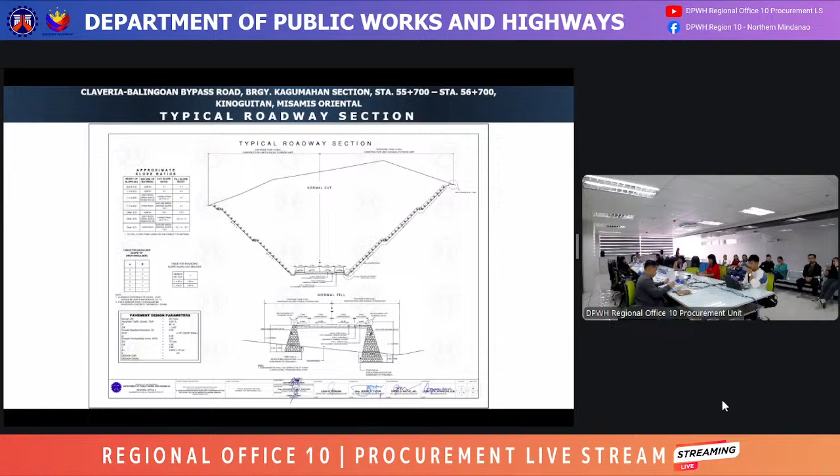This is the site photos, the beginning section, mid section, and end section of the project. And this is the typical roadway section for this project. Also shown are the nearby quarry sources, namely Donguan, Santa Ines River Quarry, and Agayan River Quarry.

This is the bill of quantities for this project, divided into several parts. For part A, facilities for the engineer. For part B, other general requirements such as project billboard, occupational safety and health, traffic management, mobilization, demobilization. For part C, earthworks. For part H, miscellaneous structures. For the minimum equipment requirements, we have 7 major equipment and 1 minor equipment, for a total of 8 equipment.

Also, in pursuant to Department Order 110, Series of 2024, which is the implementation of ISO 9001-2015 certification requirement for large A, medium B, and medium A contractors in the procurement of infrastructure projects of the department. Note that the license size range for this project is at least medium A.

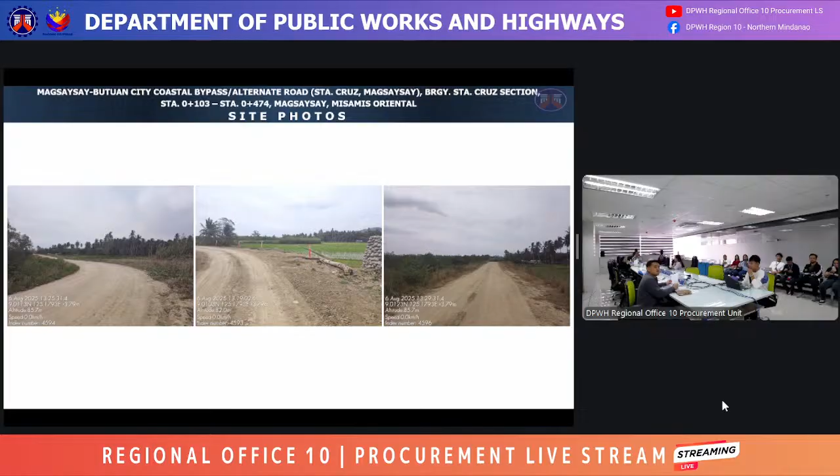This is the site development plan for this project, and these are the site photos showing the beginning section, mid section, and end section. This is the typical roadway section.

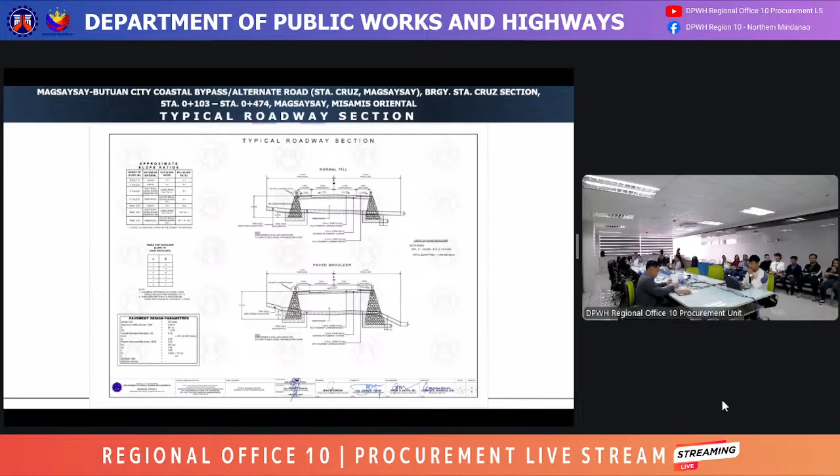Also shown are the nearby quarry sources, namely Panaghusa, Hiusa, and Tibon River Quarry. This is the bill of quantities for this project.

For the minimum equipment requirements, we have 16 major equipment and 9 minor equipment, for a total of 25 equipment. Also included is Department Order 11, Series of 2017, on the inclusion of the minimum material testing equipment in the technical component of the bid.

Also from Department Order 80, Series of 2016, the mandatory use of joint sealer equipment for sealing joints on concrete pavements, and in pursuant to Department Order 110, the implementation of ISO 9001:2015 certification requirement for Large A, Medium B, and Medium A contractors in procurement of infrastructure projects. Note that the contractor's license size range for this project should at least be Medium A.

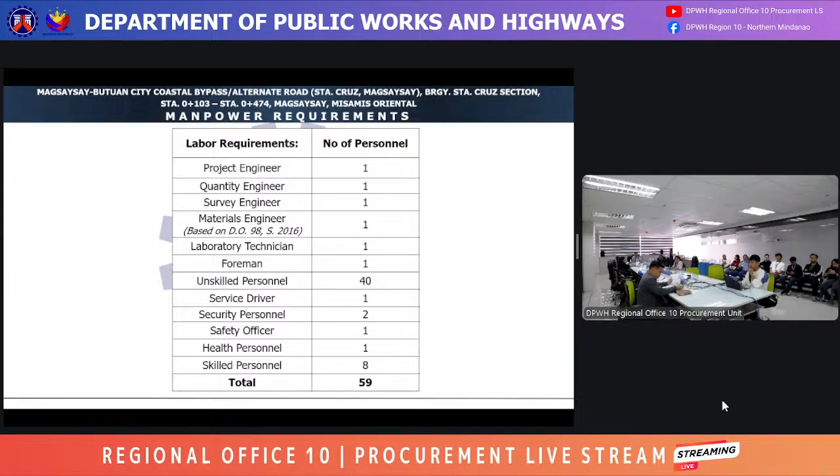For the manpower requirement, we have 59 personnel to complete the project, which is also included from the revised guidelines on the accreditation of contractors, consultants, and material engineers, Department Order 98, Series of 2016.

For the information of everybody, the submittals for this project were all already approved, and this is the cover page of the approved DED plan for this project.

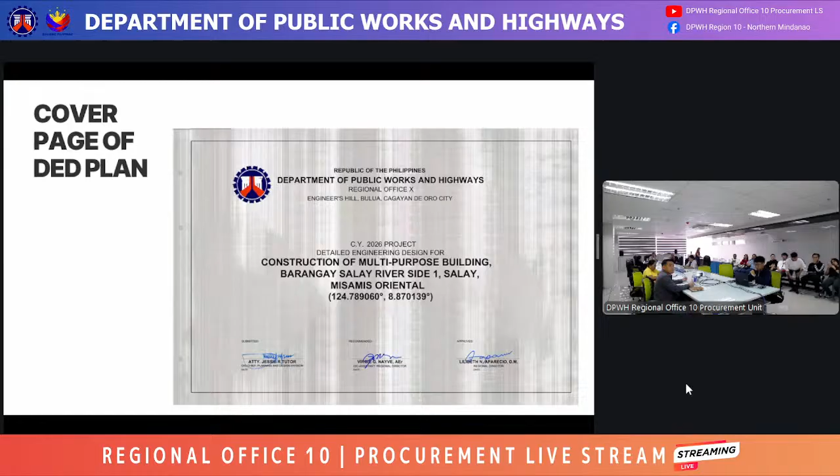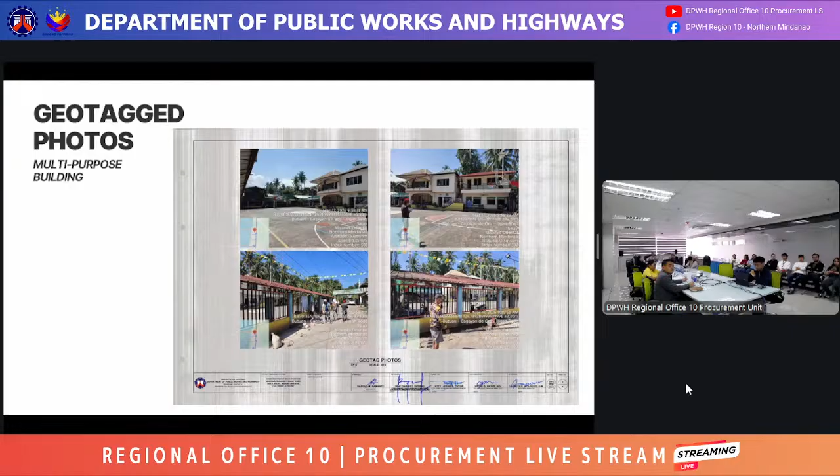Shown here is the sketch plan of the project location, the cover page of the DED plan, the site development plan, and vicinity map. We also have here the geotag photos of the project and the perspective. And these are the floor plans.

For the bill of quantities, we have the following: Part A, facilities for the engineer; Part B, other general requirements; Part C, earthwork; Part D, reinforced concrete; Part E, finishing and other civil works; Part F, electrical.

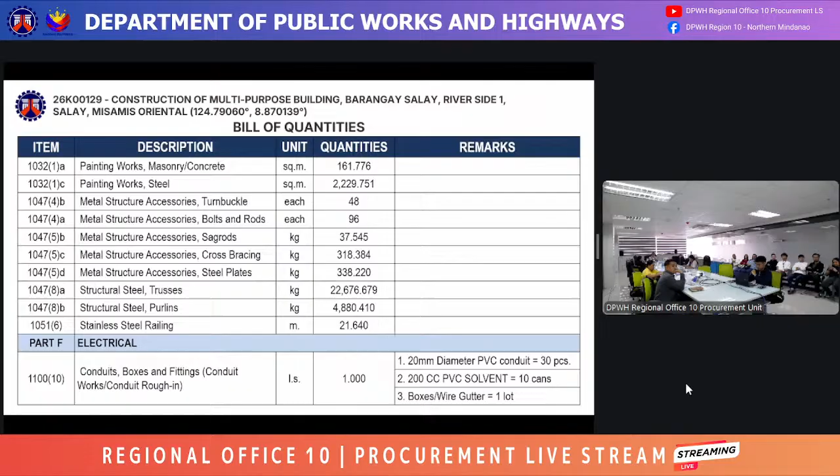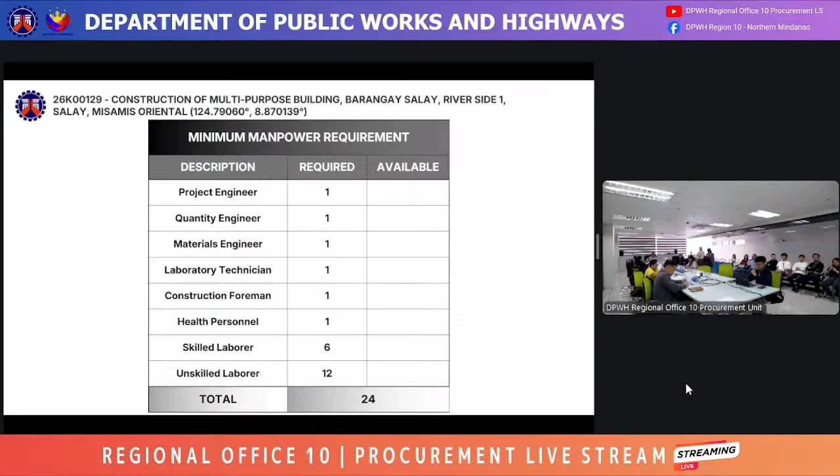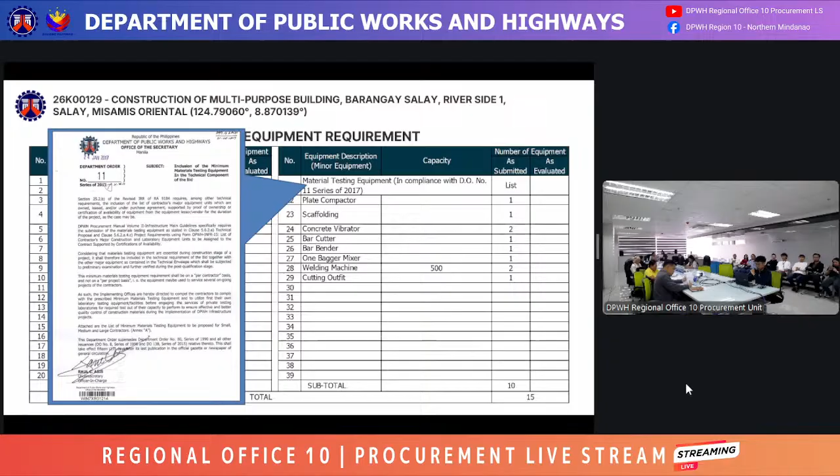For the minimum manpower requirement, this project requires at least 24 personnel for its completion. And for the minimum equipment requirement, this project requires 5 major equipment and 10 minor equipment, with the inclusion of material testing equipment in compliance with DO number 11 series of 2017, with subject inclusion of the minimum materials testing equipment in the technical component of the bid.

And we have here the list or the minimum materials testing equipment for small, medium, and large contractors.

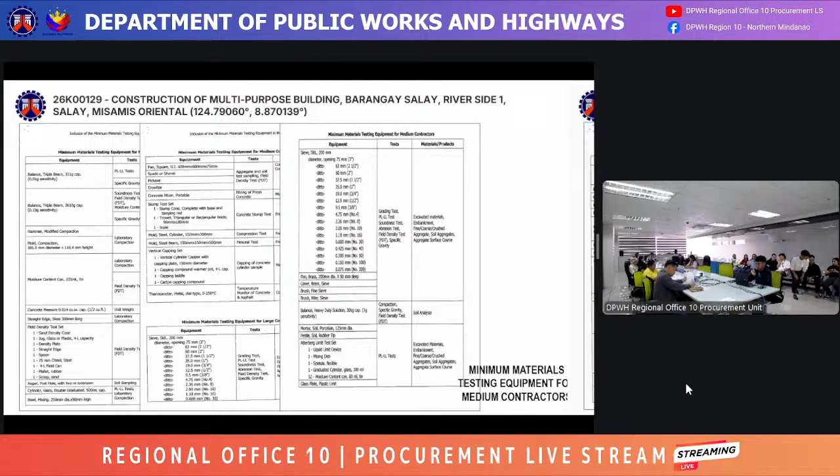For the minimum contractor size range, this project requires small B with license category C and D.

And we have here the sample format for the list of the contractor's major construction and laboratory equipment units to be assigned to the contract, supported by certifications of availability. And for the summary of submittals, the POW, ABC, DUPA certifications, as well as the DED plan, were already approved.

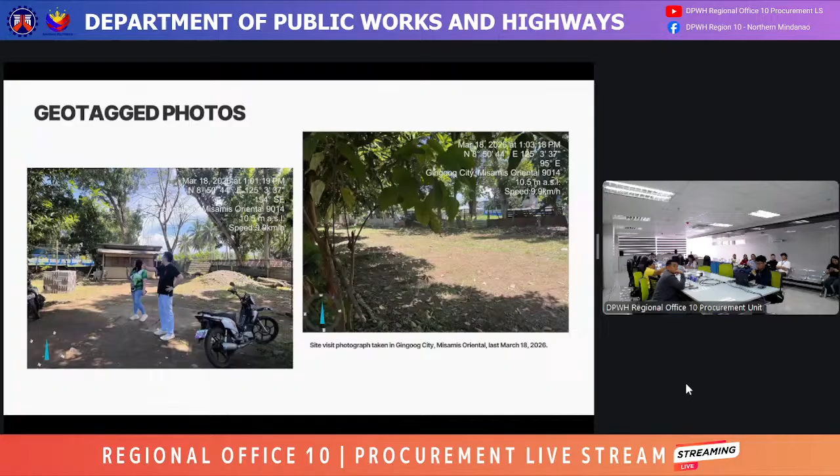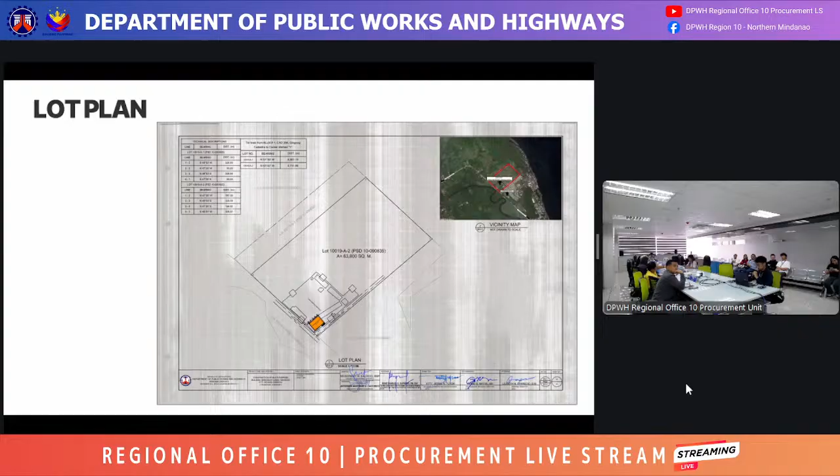These are the geotag photos of the site visit dated March 18, 2026. And we have here the parcellary plan of the project location, the cover page of the DED plan, the lot plan and site development plan. And this is the perspective of the project and the floor plan.

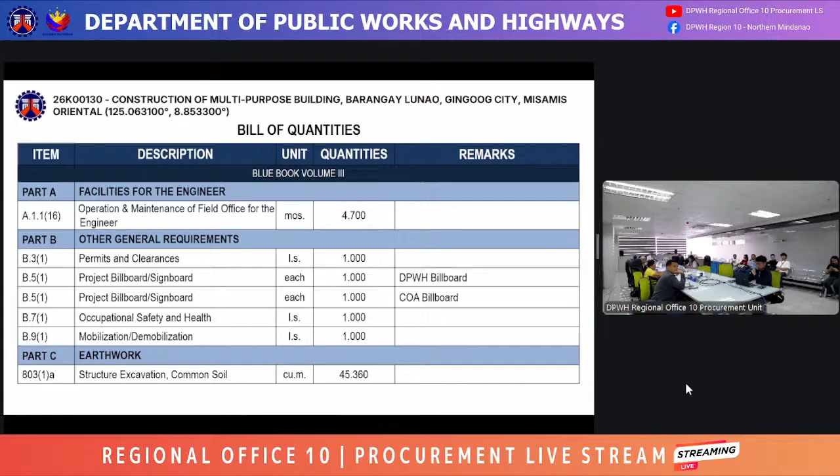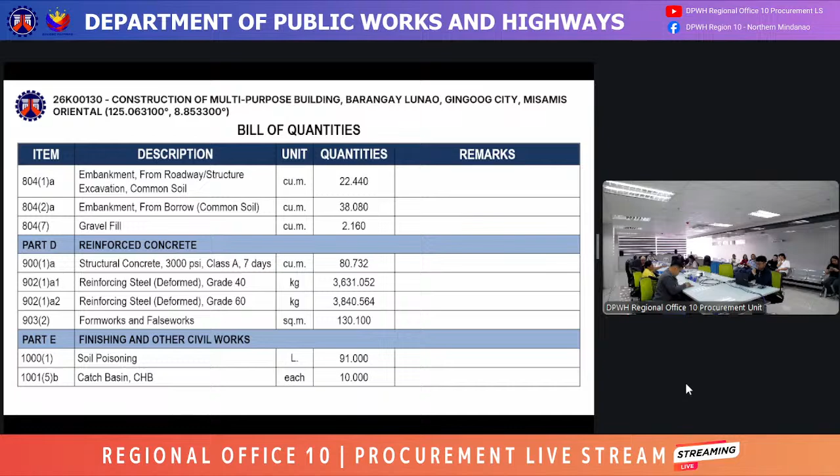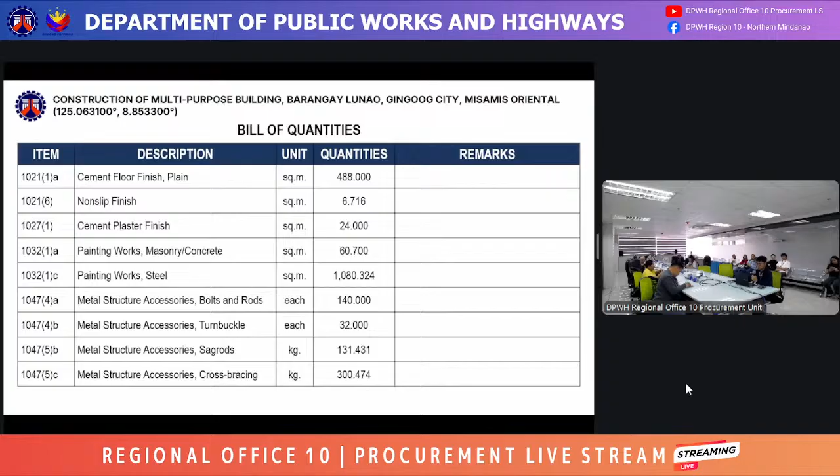For the bill of quantities, we have the following. Part A, facilities for the engineer. Part B, other general requirements. Part C, earthwork. Part D, reinforced concrete. Part E, finishing and other civil works. And lastly, Part F, electrical.

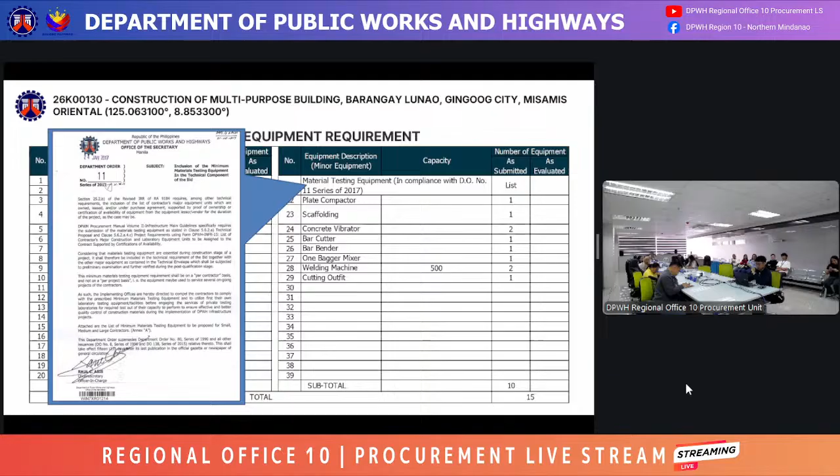For the minimum manpower requirement, this project requires at least 24 personnel for its completion. And for the minimum equipment requirement, this project requires 5 major equipment and 10 minor equipment with the inclusion of material testing equipment in compliance with DO number 11, series of 2017, with subject inclusion of the minimum materials testing equipment in the technical component of the bid.

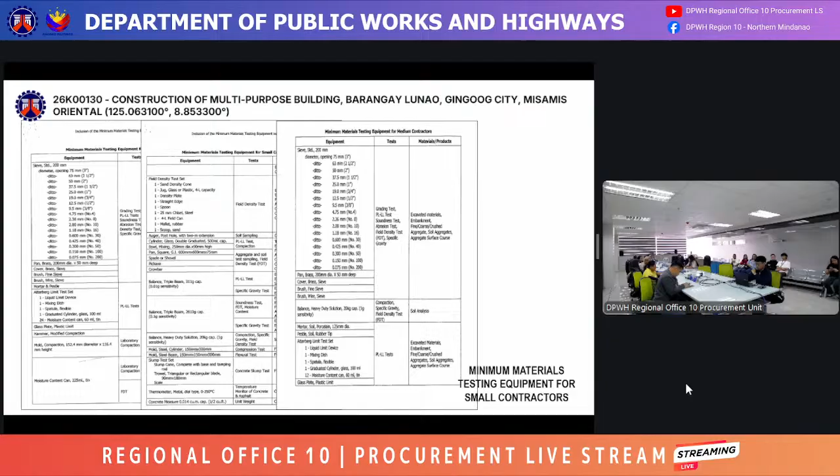This is the list, or these are the minimum materials testing equipment for small, medium, and large contractors. For the minimum contractor size range, this project requires small B with license category C and D.

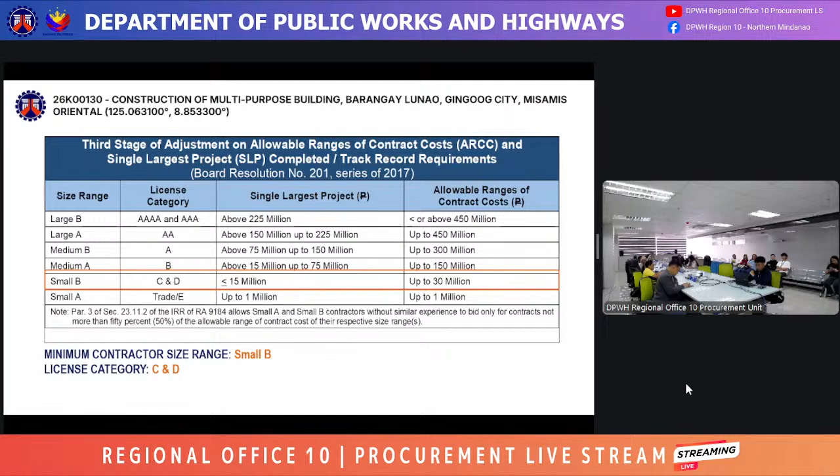And we have here the format for the list of the contractor's major construction and laboratory equipment units to be assigned to the contract, supported by certifications of availability. And for the summary of submittals, the POW, ABC, DUPA certifications as well as the detailed engineering design plan were already approved.

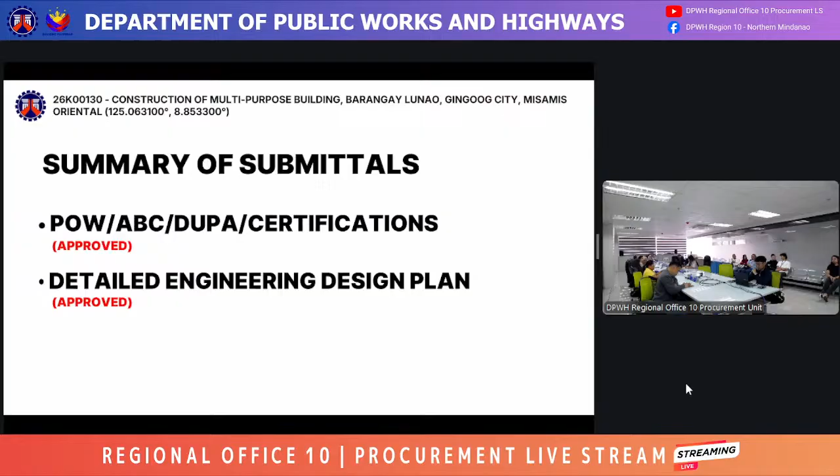For the last project, contract ID 26K00131, project name: construction of multipurpose building, Barangay Poblacion, Sugbongcogon, Misamis Oriental, with coordinates 124.788889 degrees, 8.949069 degrees, located at Barangay Poblacion, Sugbongcogon, Misamis Oriental, with an appropriation of 7 million pesos and an ABC of 6,925,356 pesos and 90 centavos. Fund source FY 2026 GAA.

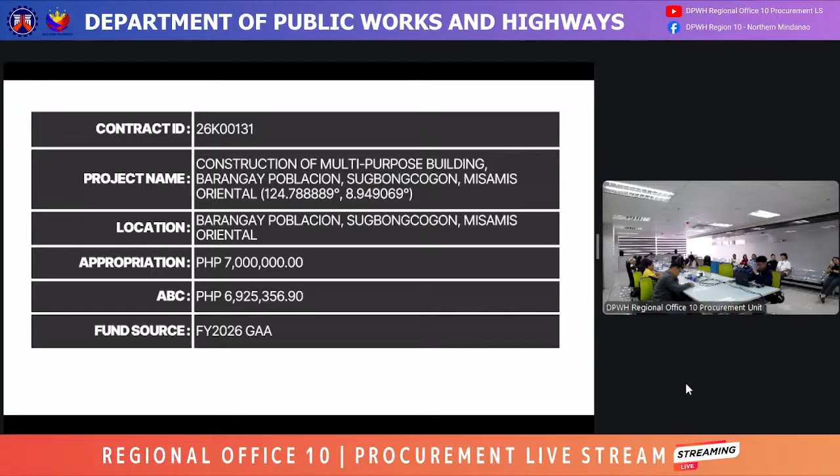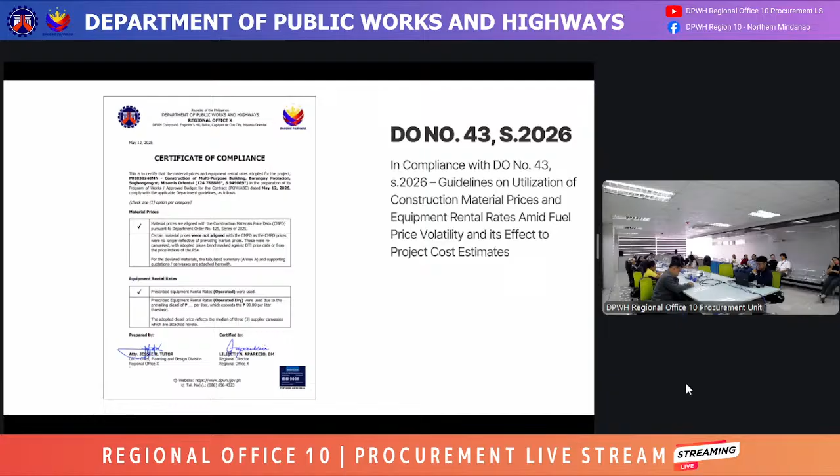These are the certificate of validation and certification of the application of the latest CMPD and updated cost references in compliance with DO number 1 series of 2026. And shown here is the certificate of compliance in accordance with DO number 43 series of 2026 and the market scoping in accordance with section 10 of RA number 12009.

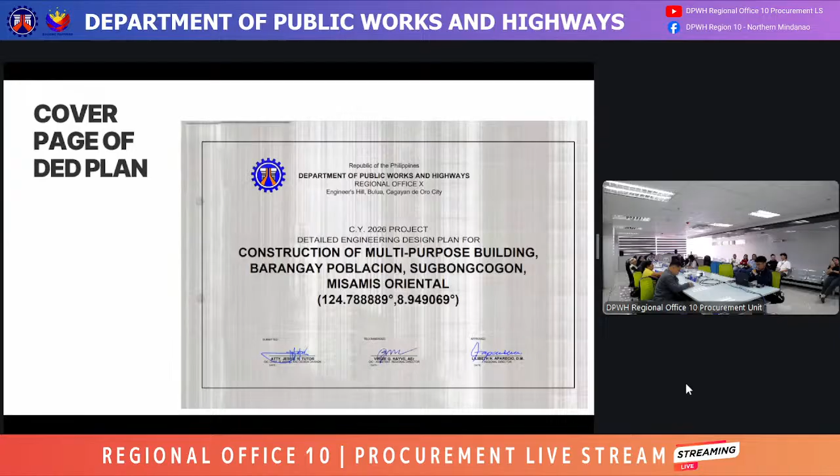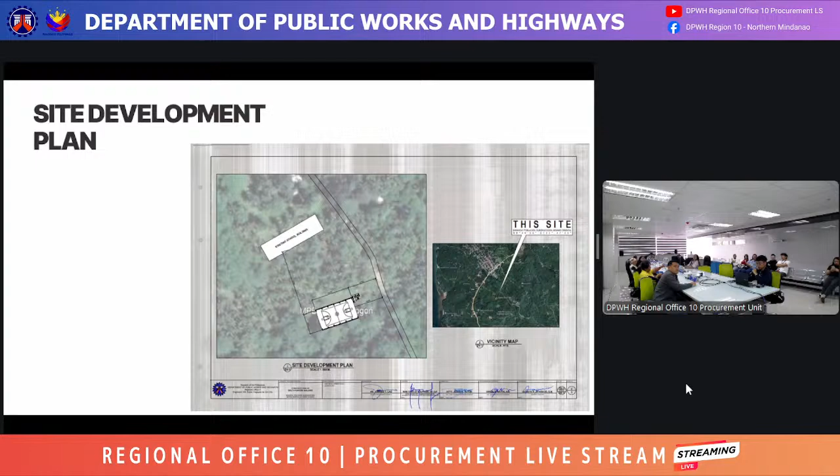We have here the geotag photos of the site visit on March 18, 2026. And this is the cover page of the DED plan. The sketch plan of the project location. The location plan. The site development plan. The floor plan. And the perspective of the multipurpose project.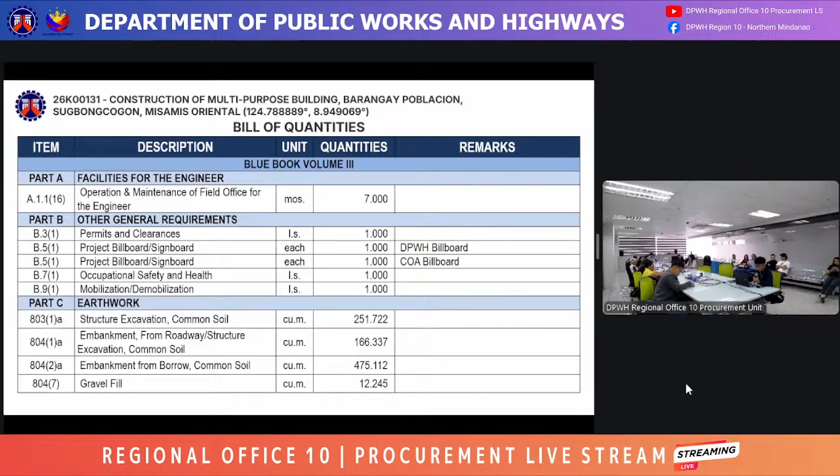For the bill of quantities, we have the following. Part A, facilities for the engineer. Part B, other general requirements. Part C, earthwork. Part D, reinforced concrete. Part E, finishing and other civil works.

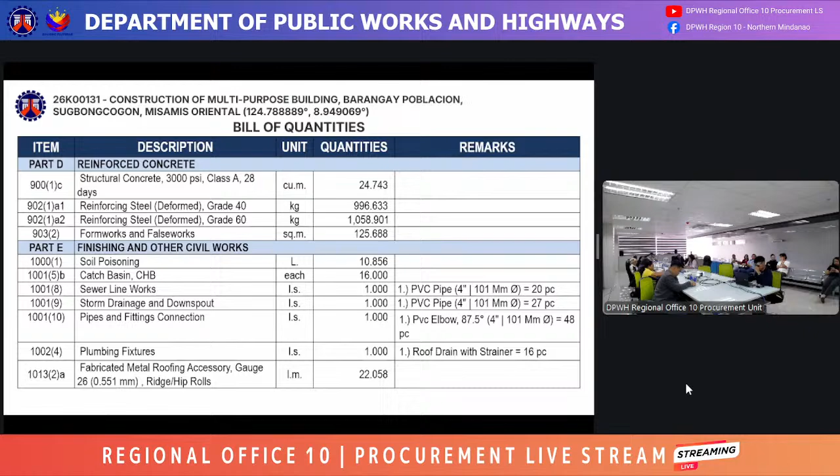And lastly, Part F, electrical.

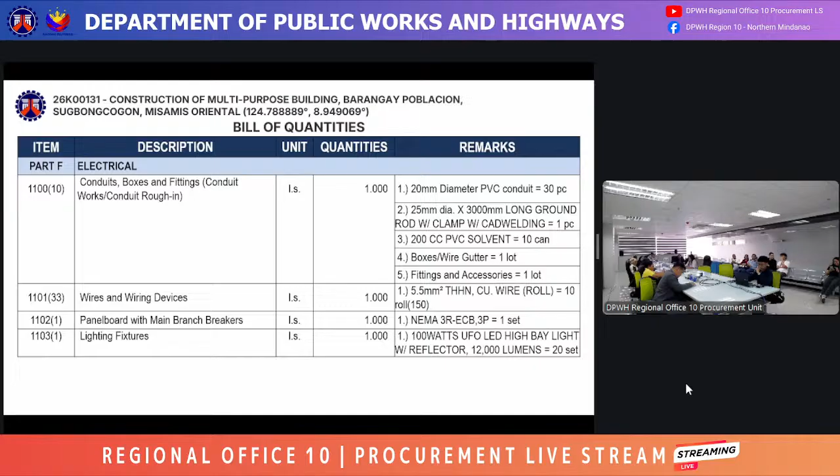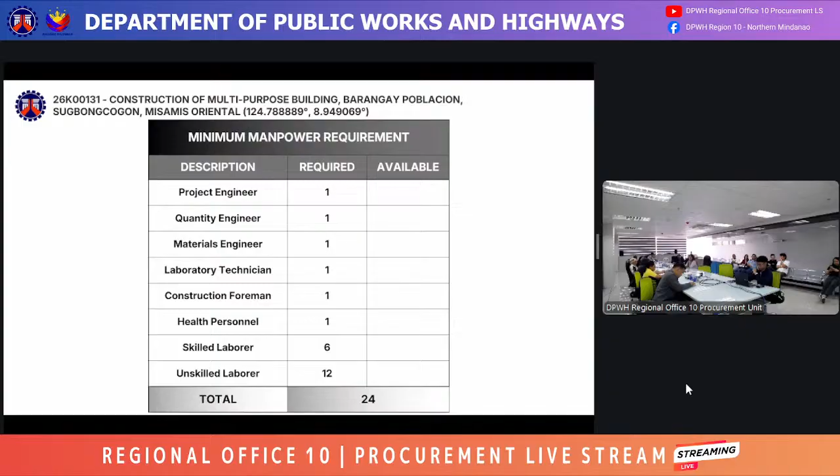For the minimum manpower requirement, this project requires at least 24 personnel for its completion. For the minimum equipment requirement, this project requires 5 major equipment and 10 minor equipment with inclusion of material testing equipment in compliance with DO number 11 series of 2017, with subject inclusion of the minimum materials testing equipment in the technical component of the bid.

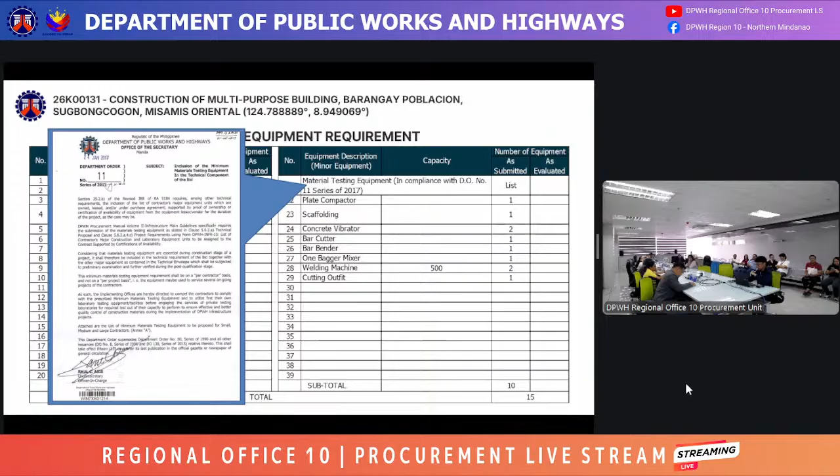We have here the minimum materials test equipment for small, medium, and large contractors. For the minimum contractor size range, this project requires Small B with license category C and D.

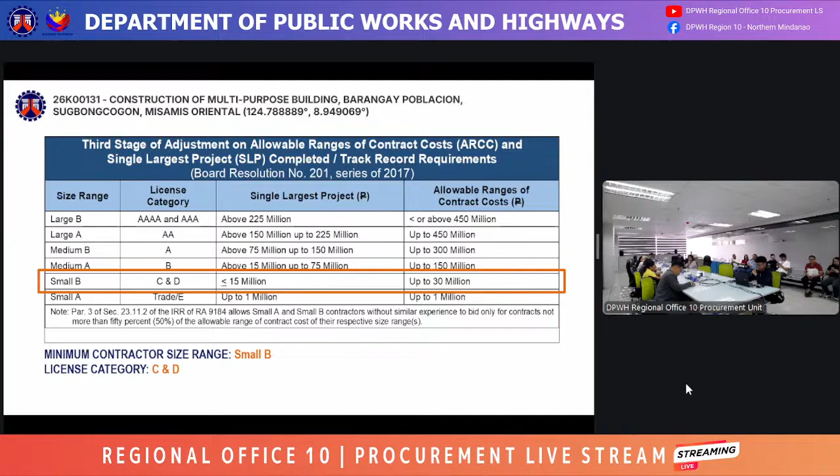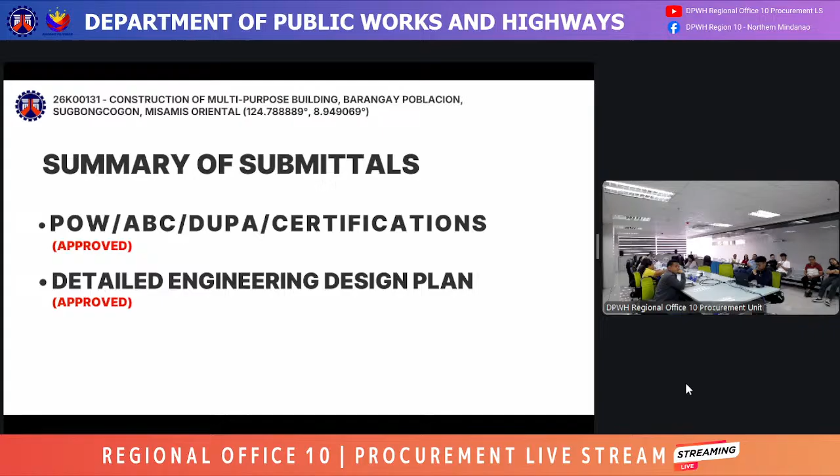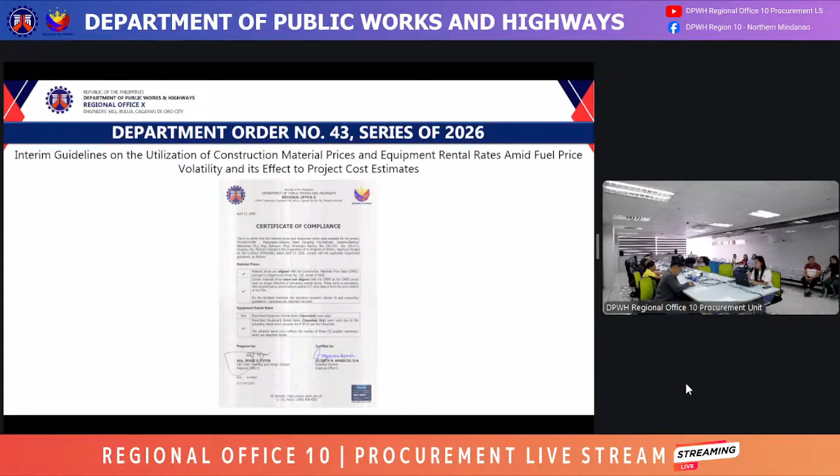This is with subject guidelines on the updating and monitoring of POW and ABC in accordance with the latest CMPD for projects under the DPWH FY 2026 budget, and also the certificate of compliance in accordance with Department Order number 43, series of 2026, with subject interim guidelines on the utilization of construction material prices and equipment rental rates amid fuel price volatility and its effect on project cost estimates. We also have the approved copy of the market scoping in accordance with Section 10 of Republic Act number 12009, New Government Procurement Act, and its implementing rules and regulations, IRR, to ensure realistic, cost-effective project procurement management plans.

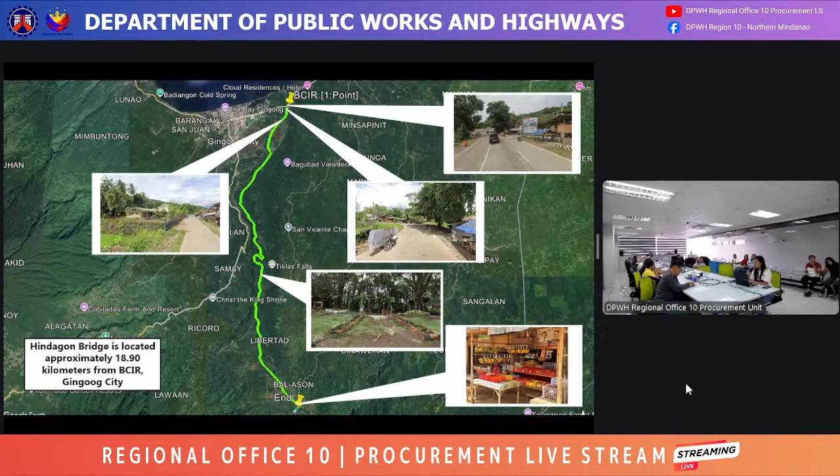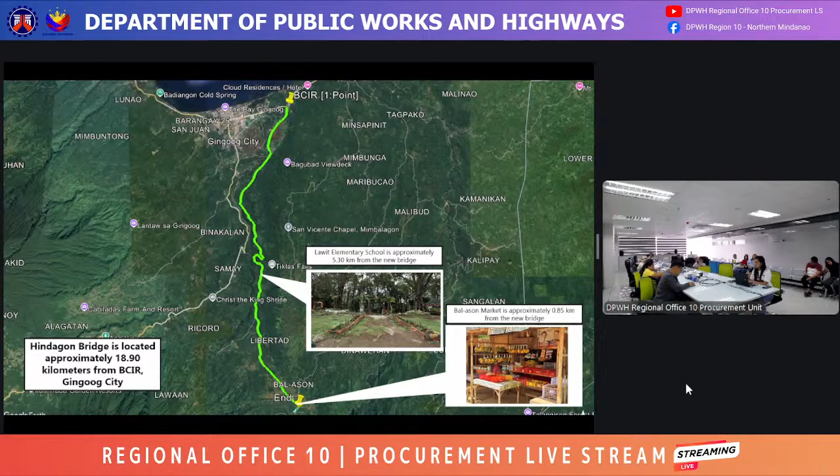We also have here the approved detailed engineering design plan cover page, its location map, and for the access road map, Hindagon Bridge is located approximately 18.9 kilometers from the Butuan City, Cagayan de Oro City, Iligan City Road in Gingoog City, Misamis Oriental. We have here the Lawit Elementary School, approximately 5.3 kilometers from the new bridge, and the Bal-ason Market, approximately 0.85 kilometers from the new bridge.

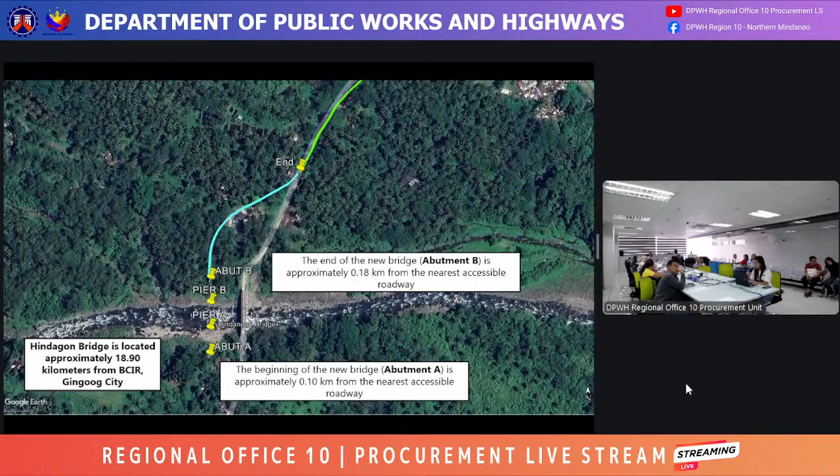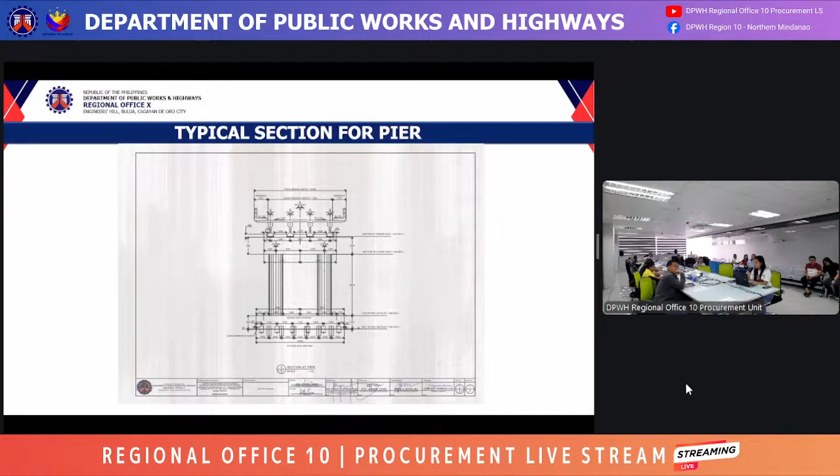The end of the new bridge, abutment B, is approximately 0.18 kilometers from the nearest accessible roadway, and the beginning of the new bridge, abutment A, is approximately 0.10 kilometers from the nearest accessible roadway. The topographic plan, the general plan and elevation, the typical section for the abutment, and the typical section for the pier. The summary of quantities.

We also have here the material sources map showing the nearby quarry sources around the site. And these are the bill of quantities covered by the construction of concrete bridge: Part A, facilities for the engineer; Part B, other general requirements; Part C, earthwork; Part F, bridge construction; and Part G, drainage and slope protection structures.

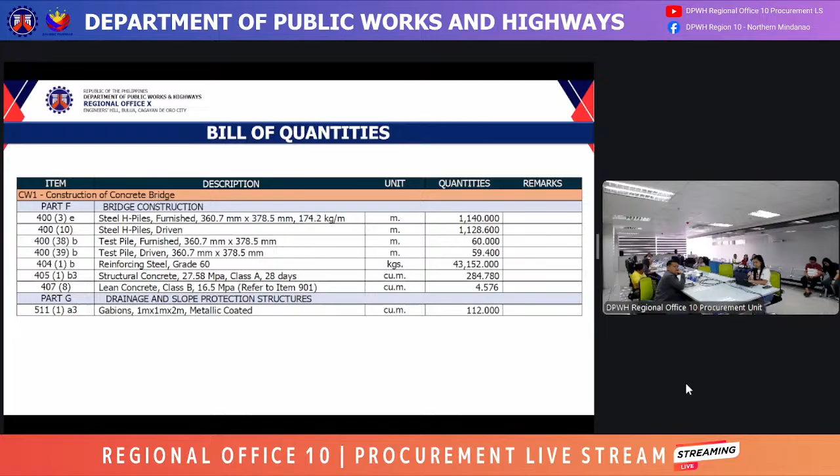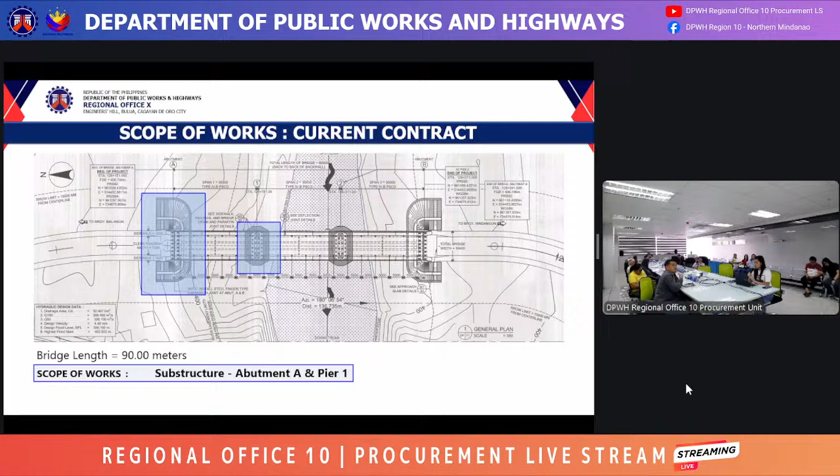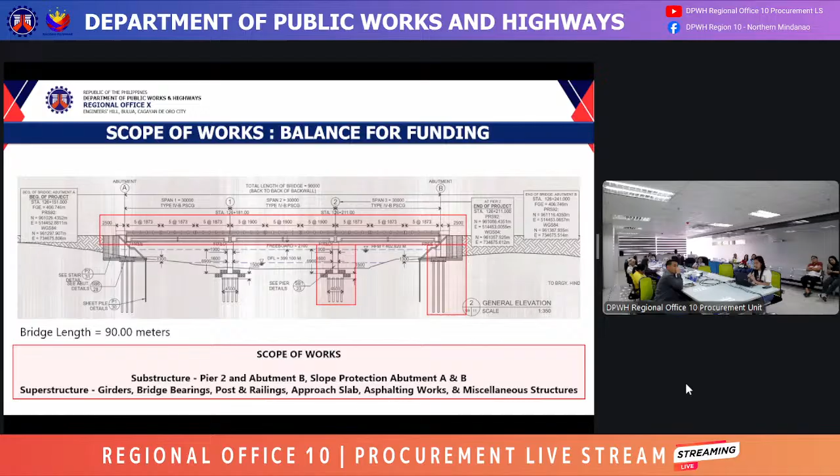For the scope of works of the previous contract, we have here the certification of the non-availability of SLD, since this is the project's first contract. As for the scope of works of the current contract, it includes the construction of substructure, specifically abutment A and Pier 1. The scope of works of the balance for funding includes the substructure, Pier 2 and abutment B, the slope protection for abutment A and B, and for the superstructure, girders, bridge bearings, posts and railings, approach slab, asphalting works, and miscellaneous structures.

For the minimum equipment requirement, this project will require at least 21 major equipment and 15 minor equipment, for a total of 36 equipment, with the inclusion of material testing equipment set based on Department Order Number 11, Series of 2017, with subject inclusion of the minimum materials testing equipment in the technical component of the bid.

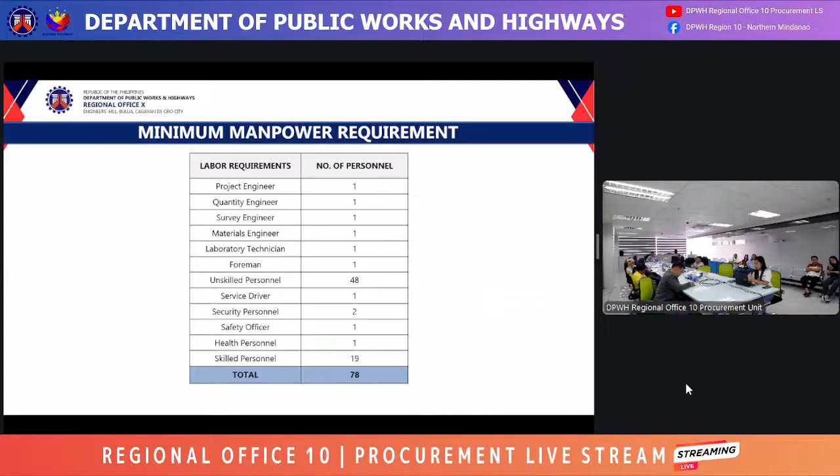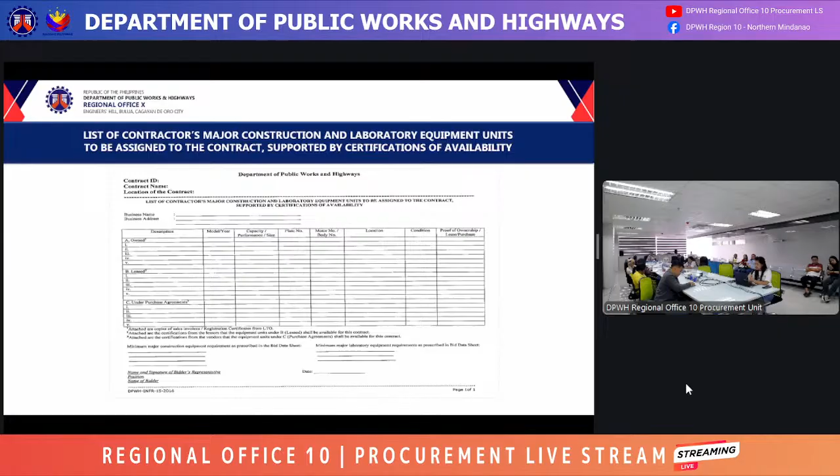For the minimum manpower requirement, this project will require at least 78 personnel to complete. We also have here a sample form for the list of contractor's major construction, and laboratory equipment units to be assigned to the contract, supported by certifications of availability.